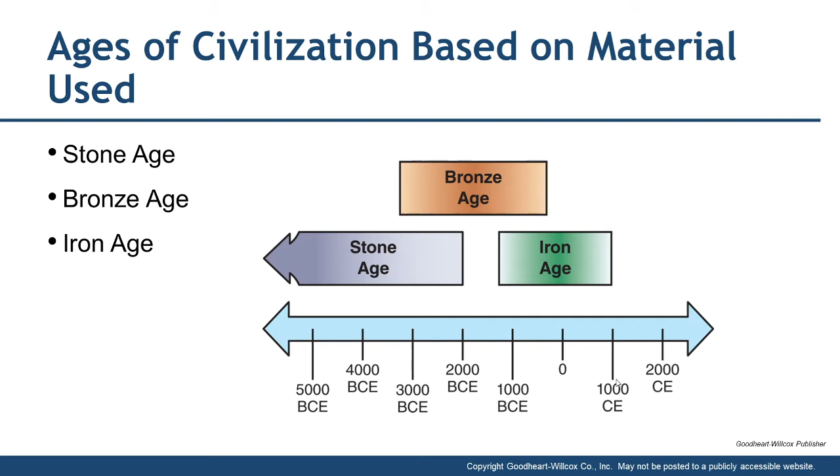Lots of times the age in which you live is defined or called by the main material that was being used. So we had the term Stone Age. If you look at the chart, the Stone Age ended around 2,000 years before Christ, and that's when, obviously, 1,000 years before then, it just shows how there are overlapping time periods where they're using both. We can see the Bronze Age overlapped the Stone Age and the Iron Age. It looks like the Iron Age ended in year 1000, but I don't know why that would be, because we are still heavily dependent on iron for steel. This little graph, I don't know, could use a little work. But anyways, that gives you the idea. Maybe they're ending iron at 1000 because that's when steel started to take over, even though steel is made 90+% out of iron.

Stones were the original materials for tools, found in nature, in their raw form. They are hard and brittle. They needed better materials for better tools.

They used to go and search for stones that they could use another stone with in order to knock off a piece that was sharp, and that was a skill. They used to flake it. If you go online, you can find videos of making Stone Age tools. They had to constantly be searching for these because the tools they would make would break down quickly because they were so hard and brittle.

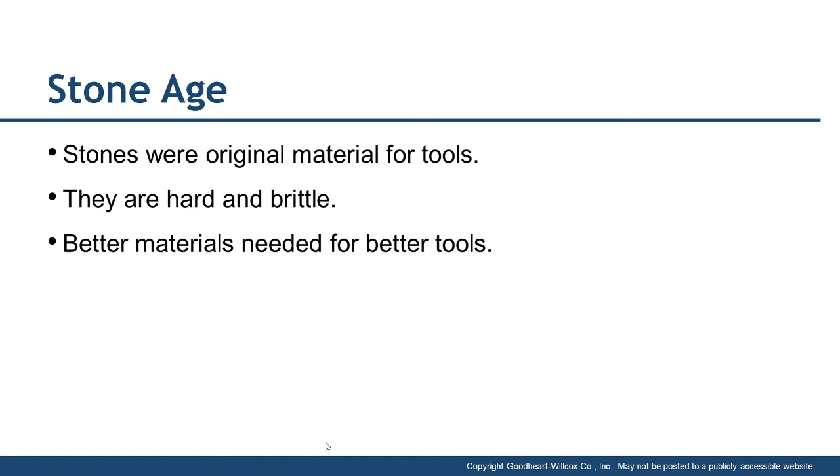So they needed tools that were better. These tools were very sharp, these made out of stone, but they just would not hold an edge for very long. They would hold an edge, but if you're cutting something like an animal to skin it, and you hit some bone with that rock cutting instrument, it could chip very easily. Just would not take any kind of abuse. So they were constantly on the move for new stones to make into cutting tools.

Metallurgy is the science and practice of working with metals. Basically, you can't really work with them until you can have them, so extracting metal from its ore was the first step. There's a link to a video showing this primitive skills channel that shows a person trying to make some iron the old way, and you can see it's very, very labor intensive, and hence the amazing ability for us now to make tons and tons of steel at relatively low cost.

Alloying and processing the metal to achieve desired properties. We're going to be talking a lot about alloys, which is basically a mixture of metals. Copper and gold were the first metals to be used.

They're found in nature. You can see this is a piece of copper ore on the right here, found in nature in metallic form, so they could use them as is. And then they could hammer and forge them into usable shapes and tools because they were malleable. They were able to be formed. Rock and stone you cannot form. All you can do is break them into different pieces, but you cannot fundamentally take it and change its shape.

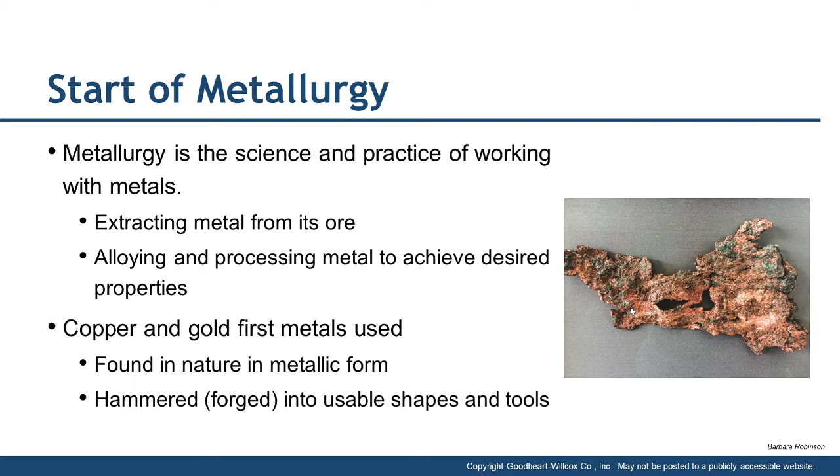Copper and tin ore melted together to produce bronze. So copper and tin make bronze, it's an alloy. Smelting is the process of extracting metal from its ore. That was on the last page. Alloying is a process of combining metals or non-metal together to make a different material.

Alloy bronze is stronger than copper. Copper is very soft, pure copper. Even the copper wire we have, I believe, is alloyed to some degree. Can't have pure copper.

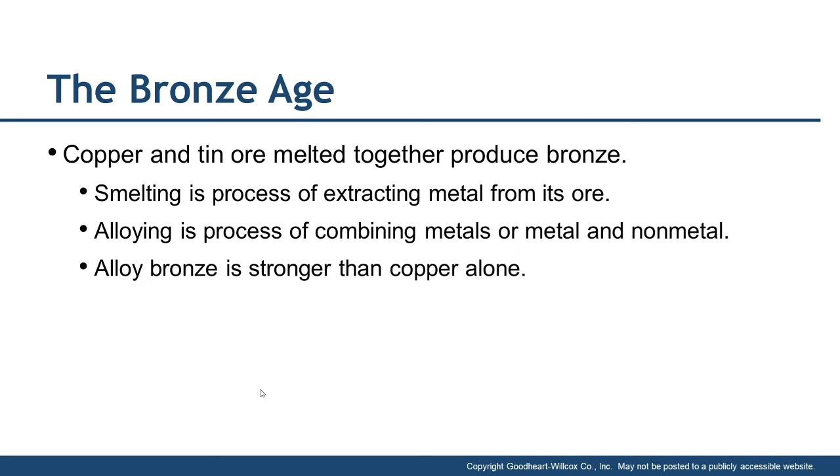Molten metal is cast into sand molds for cast bronze. So this is how they made, like you can see this little figurine here on the right. Open face sand molds were the first method of casting, used to produce intricate shapes. If you could carve a mold, you could make whatever shape you wanted.

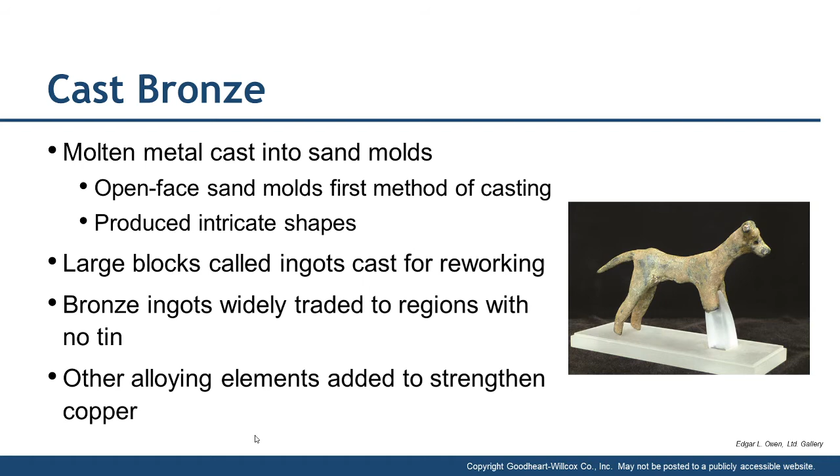Large blocks were called ingots for reworking. That's a term we still use today, even though we don't do the ingot method very much anymore. Bronze ingots were widely traded to regions with no tin. Other alloying elements were added to strengthen the copper, like nickel, one of them.

The Iron Age: first iron products were made from meteoric iron. So basically, if you're lucky enough to find a meteor, you had some quality material there. Very rare and highly prized for obvious reasons, not too easy to find meteorites. Even though we get hit all the time, most of them just burn up in the atmosphere and don't make it to the ground.

Smelting iron ore came about 1200 BCE. Iron ore, charcoal, and limestone are heated to produce the iron metal. Basically, smelting is to remove the iron from the ore, away from the other materials making up the rock. When that's removed, it's called slag.

This is more complex than smelting copper - multiple steps, higher temperatures, longer times, a lot more difficult. It's also difficult to completely remove the slag.

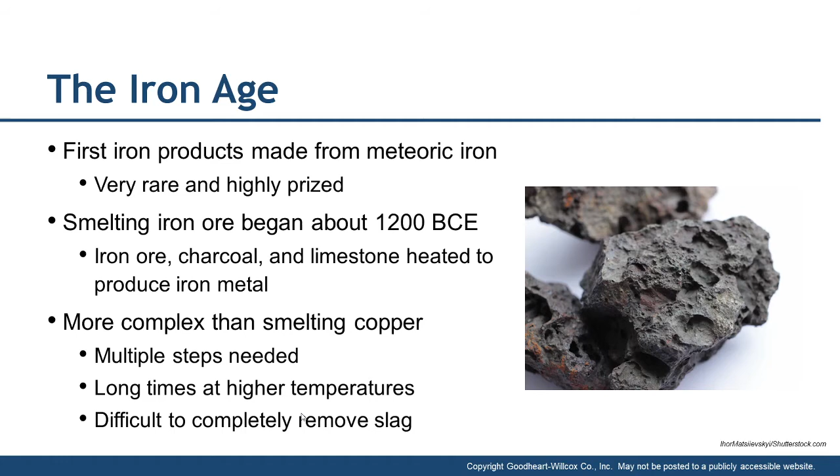Your melting temperature for iron is way higher than non-ferrous metals like aluminum. As a machinist, you know this well - aluminum will melt if you don't keep coolant on it and run too fast without coolant. Unless you push it really fast to make a thick chip, if you go slow you tend to melt it instead of cut it.

Wrought iron is smelted iron forged repeatedly to drive out slag. You're used to seeing blacksmiths with the hammer and anvil, hitting the iron and seeing sparks fly - that's what's happening when he hits that material with the hammer. He's driving out the slag; those sparks are the slag. So when you hit a piece of material that doesn't have a lot of slag in it, you don't see many sparks. A high quality, pure iron won't have those sparks coming out, or as many.

This produces stringers of iron metal called blooms. Blooms are forged into usable tools by heating and then working with a hammer, or in the modern era with some kind of press, a hammer press.

Wrought iron had a low carbon content - basically almost nothing. So it's really pure iron, basically pure iron. Bloomeries were the earliest furnaces for smelting iron ore.

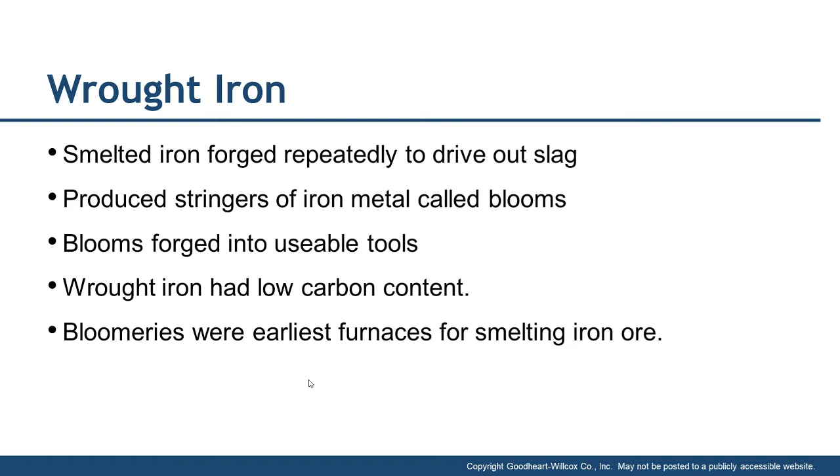Wrought iron and true steel - they produced true steel by melting in small crucibles. This higher quality iron was slag free. The slag is like an impurity that causes weakness, because the rock is brittle, and if you've got areas in your steel that are brittle, your iron is not going to be very strong.

The slag floated to the surface and separated from the metal. This kind of wootz steel has a higher carbon content - it's not pure iron, it's got to have some carbon in it to be called a steel. Much stronger - it was really the first true steel. They really didn't know why they were getting the results they were getting, but they just knew it worked.

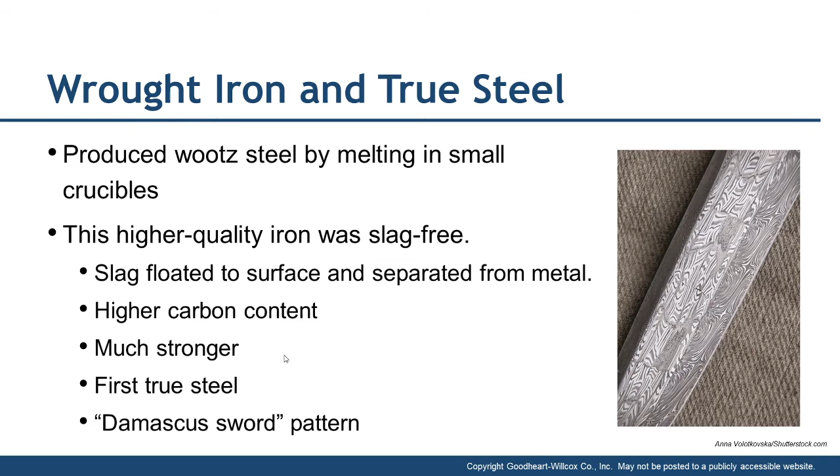You can see the Damascus sword pattern on the sword to the right - that's an obvious tip-off that it's Damascus steel.

Cast iron, the third form of iron, is made using blasts of air to increase furnace temperatures. It was independently discovered in Europe, Asia, and Africa - not sure where it originally started, but it looks like one of those things discovered simultaneously because the need was there. It was cast into simple shapes called pig iron - there's a thing in the book about the molds looking like little pigs suckling on their mother, and that's where the term pig iron came from.

This iron is not like wrought iron. Wrought iron has no carbon in it, steel has some carbon in it, and cast iron is 2 to 6% carbon, so it's a middle of the road. Normally most carbon content is going to be around 2%.

Cast iron contains carbon, silicon, and other elements, which lower the melting point, making it easier to cast. It's harder and more wear resistant than wrought iron, but very brittle - though it can take compressive loads, which we will cover later.

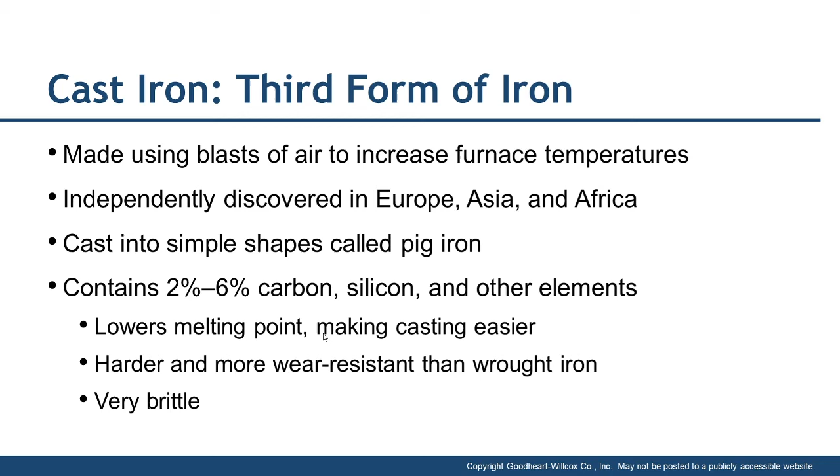Iron and steel alloying elements - carbon is the most important alloying element in iron. That's the number one thing to make steel: carbon.

As a machinist, we like to call things low carbon, medium carbon, high carbon. Normally, like if I'm making fixtures, you don't need anything fancy - low carbon, like 1018, which we will cover what those numbers mean, is fine. You don't need something really expensive to make decent fixtures with. Usually to keep the cost down you go with some kind of low carbon material, and plus it's easier to machine. So typically low carbon is what you're going to see - most of the steels you see are some kind of low carbon steel.

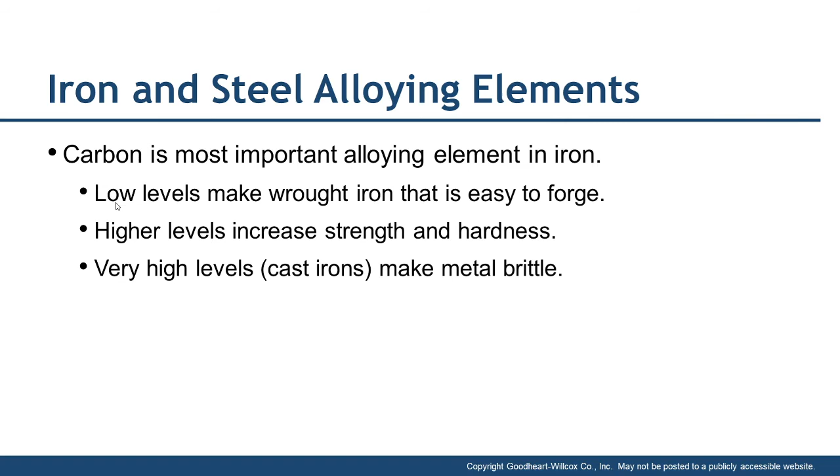Low carbon levels make wrought iron that is easy to forge. At higher levels it increases strength and hardness, and at very high levels, as in cast irons, it makes the metal brittle. Typically you don't have more than about 1% carbon in steel - it doesn't take much to totally change the game.

The Industrial Revolution in metallurgy - basically this permitted industrialization. If we didn't have steel... it really was the materials that typically led the way. Usually machine tools and such are catching up to cutting technology - in this case, machine tools are trying to catch up to computer technology, but I digress. Metals were improved by industrial inventions.

They kind of worked hand in hand - steam engines made of steel were safer and more powerful. There's a thing in the book about one of these steam engines that exploded because the steel was just not up to par, and then James Watt made his steam engine out of some crucible steel for the plates riveted together, I'm assuming for the pressure vessel, and that was successful.

Puddle iron process developed in the late 1700s produced larger volumes of higher grade wrought iron. Wrought iron has basically no carbon. Needed better process control. And the Eiffel Tower, ironically, was built in this time and made from puddle iron - a little tidbit.

Samuel Morse launched the telegraph commercially in 1844. So what did this create the need for? Tons of copper wire. The copper wire conducted electricity very well and formed long wires to communicate long distances.

Here you have an invention that needs a ton of an element that - did they cover that? Oh, they don't talk about that. The need for copper wire, since it conducts electricity well, actually helped Thomas Edison when he came along with electrical power generation. Then you had electricity which flows well over copper, and the copper helps make the electricity with electric generators.

So they kind of worked hand in hand, forming long wires to communicate long distance. Obviously the telegraph wires transformed into phone lines, and now we have the internet lines. But they make the lines smaller and smaller and smaller.

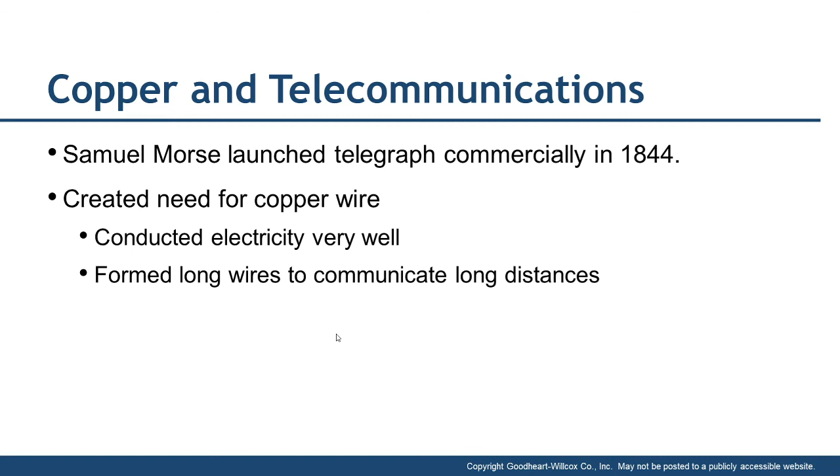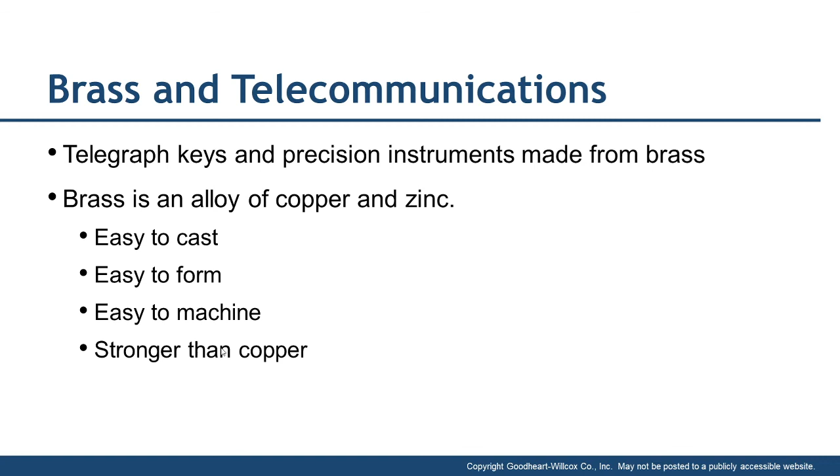Telegraph keys and precision instruments made from brass - brass is an alloy of copper and zinc. Bronze is copper and tin, brass is copper and zinc. Brass is a very popular machined material - easy to cast, easy to form, easy to machine. It cuts at short chips, so it's very forgiving machining wise. When a material short chips, meaning the chips come out and break off real easy, there's less chance of them clogging tools and breaking tools. It's stronger than copper alone - not much isn't, I mean copper is pretty soft.

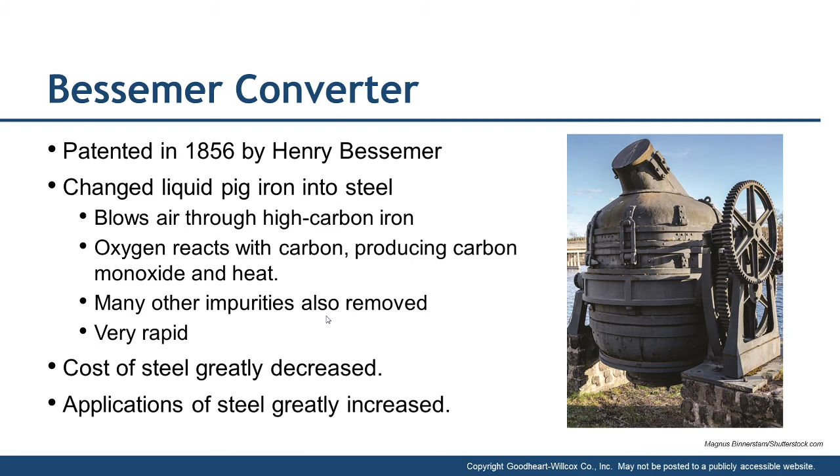This sped things up - it was very rapid. So the cost of steel greatly decreased, and application of steel greatly increased. If something becomes cheap and plentiful, people are more apt to use it versus stuff that is expensive.

Open hearth furnace, first operated in 1865 in France. Better quality steel than Bessemer, but much slower. So if you want the quality, you're going to have to pay more because it takes longer. But if you need that better quality in order to do what you need to do, it's economically viable. It took 8 hours to produce one heat, or batch, of steel - they still call batches heats. If someone has material, they'll write down the heat number on a piece of material so they know when it was made. The Bessemer converter produced a heat in less than an hour, so you're talking 8 times longer for the open hearth furnace.

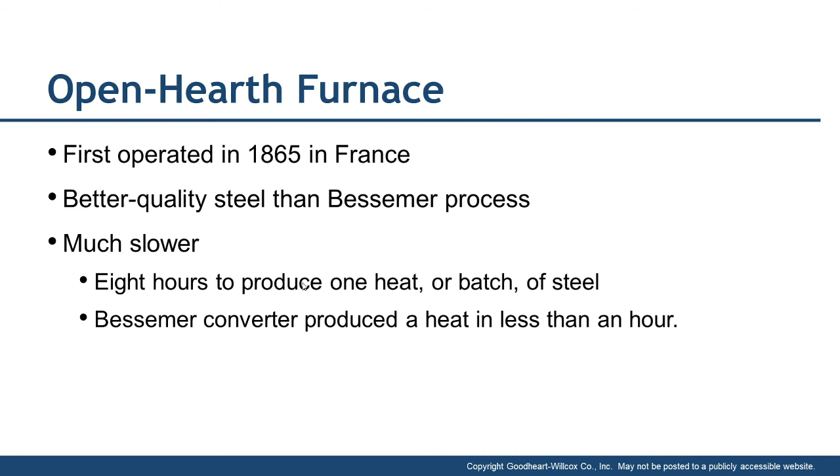Steel in America - Andrew Carnegie, kind of like the Elon Musk or one of these other tech giants of the day. These guys were the big boys that really fueled the economic engine of the country with the steel and building the steel. Andrew Carnegie was just obsessed with efficiency - he kept trying to make the whole thing as efficient as possible.

He built the world's largest steelworks in 1875 - Homestead Works near Pittsburgh, of course, steel country. Used the Bessemer process to make high volumes of inexpensive steel, and at the same time the railroads were being built or added to, since we already had the Transcontinental Railroad at that time, so there was lots of need for lots of volume of steel for these railroad rails. They added open hearth furnaces for making higher grade steel, naval armor plates as an example - obviously need some strength there for a naval vessel.

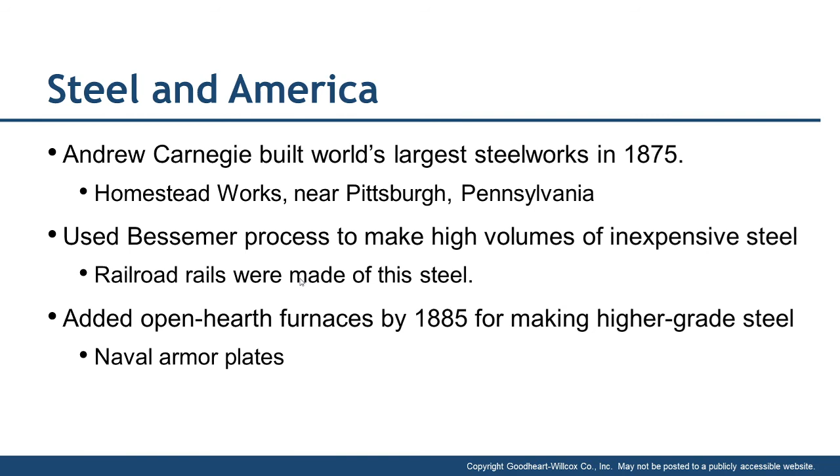Okay, probably battleship, I would think.

Electricity and metal refining. Thomas Edison developed the electric generator and distribution system in 1882. You can see how these different industries were coalescing at the same time. The ability to create electricity became valuable for refining copper. They went hand in hand—the electric current required to refine copper to high purity for electrical applications. So you needed copper for electrical generation, but people also wanted copper for communications. They went hand in hand.

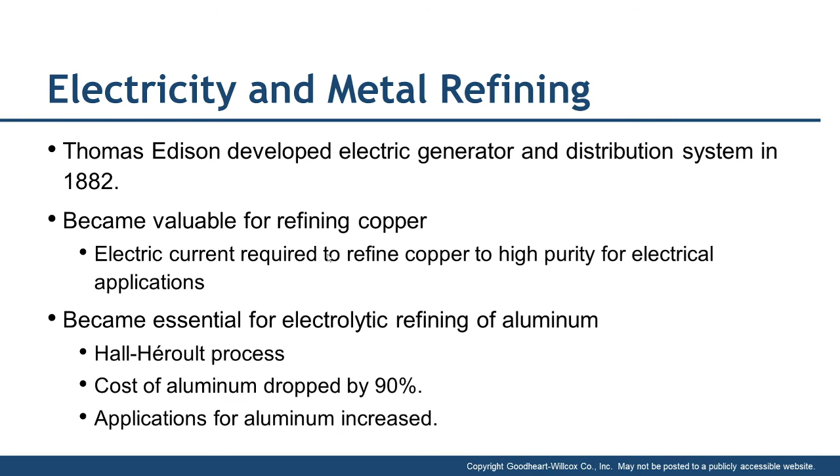Electricity became essential for electrolytic refining of aluminum. Aluminum is one of those metals that, when they built the Washington Monument, the capstone was made out of aluminum, and that aluminum was worth more than gold at the time because they didn't have electrical power like we do now. So the cost of aluminum dropped by 90%, and applications for aluminum increased. Like I said, anytime something's cheap, it gets more widely used. This was a big game changer in the last century.

In 1952, Austria installed the first basic oxygen furnace, adopted in Europe for rebuilding steelmaking after World War II. Europe was bombed into oblivion, so they started from scratch, building these basic oxygen furnaces. It's basically the same as the Bessemer converter, but using pure oxygen instead of air—much faster and more efficient than the open hearth. U.S. steelmakers didn't adopt it till '64, probably because they already had plenty of other furnaces around and didn't want to change over, but they had to in order to compete.

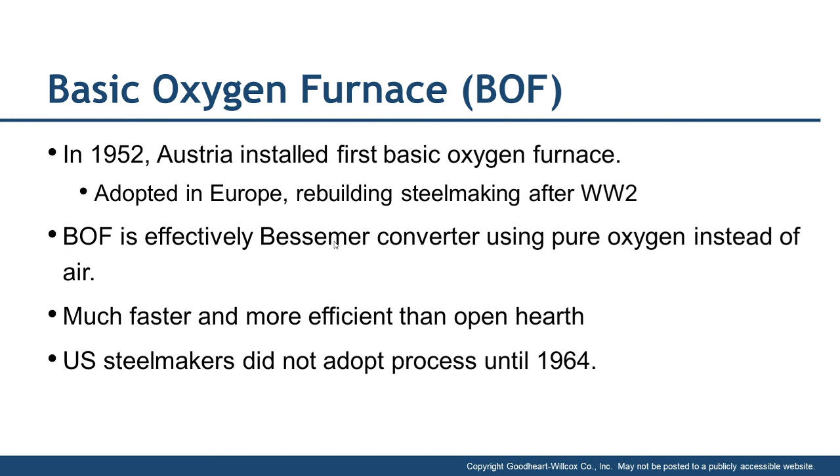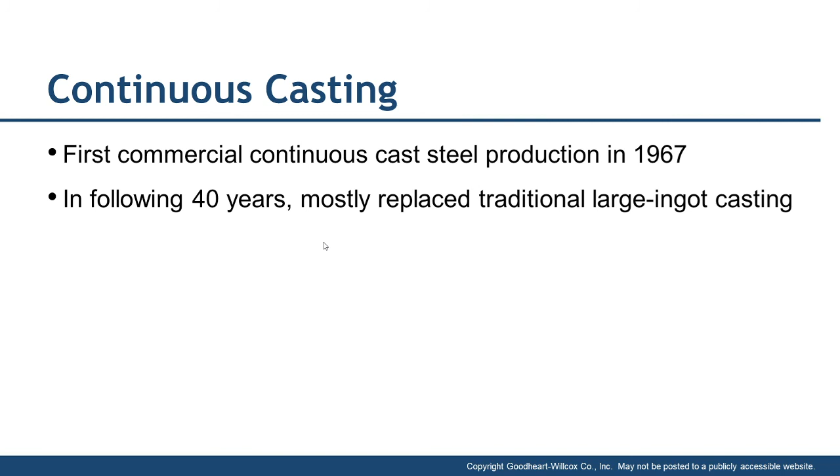Continuous casting—this is where you're continually casting steel, or iron and steel. You're not stopping; it's just one continuous process. They started this in 1967. Hard to believe, since I was born in '66. In the following 40 years, they mostly replaced your traditional large ingot casting—they used to produce one big giant piece at a time. Actually, my grandmother worked at Alcoa in the 40s during World War II, and she would drive a big forklift that moved these giant aluminum ingots around. Kind of an interesting thing.

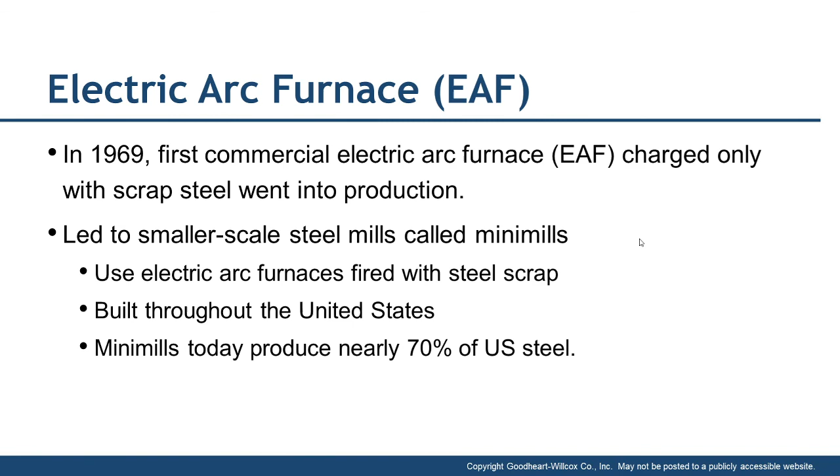Electric arc furnace—the first commercial electric arc furnace charged with scrap steel went into production, meaning loaded with scrap steel to make new steel. This led to smaller scale steel mills called mini mills, which used electric arc furnaces fired with steel scrap. So a lot of our steel is recycled. Built throughout the United States, today mini mills produce nearly 70% of our steel. It's amazing this stuff didn't come around until 1969. A lot of changes even in our lifetimes.

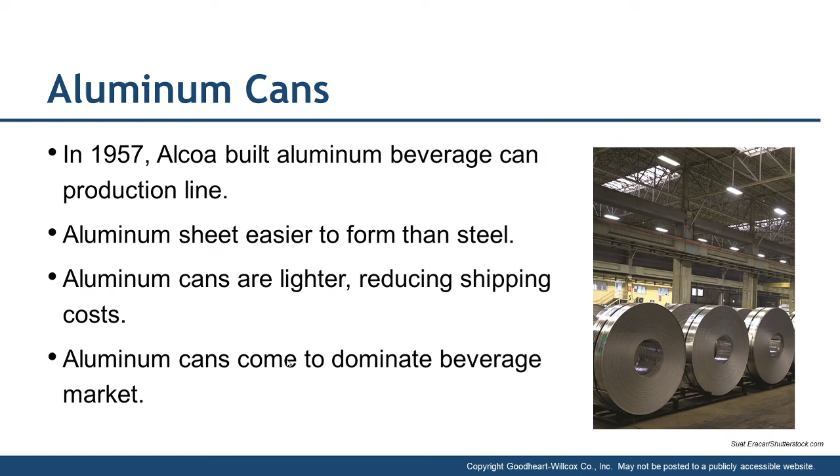Aluminum cans—Alcoa built an aluminum beverage can production line. My great grandmother worked at the one in McCook; I'm not sure if it's still there, but I think it is. Aluminum sheet is easier to form than steel, and aluminum cans are lighter, reducing shipping costs. Aluminum cans came to dominate the beverage market. I think it's something like over 90%, maybe over 95%, of aluminum cans are recycled.

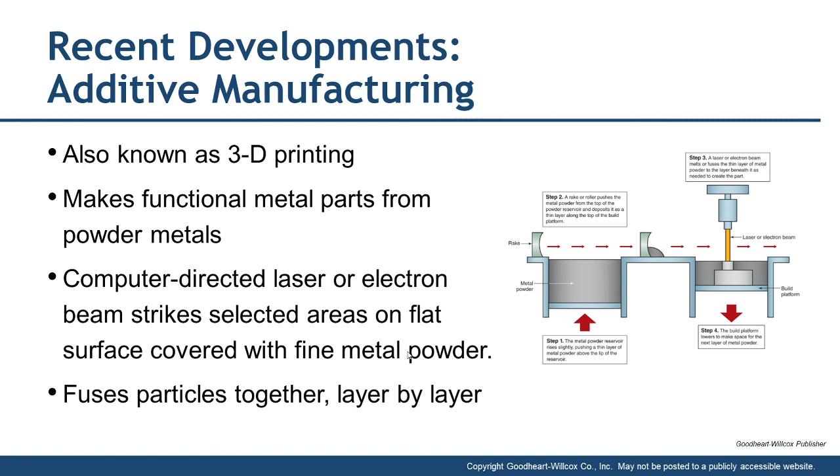That's basically how your 3D printing works, except I think the ones with plastic just move themselves up—they don't have the rake moving the powder. They're fed with a wire or cable of raw plastic instead. But it's the same concept basically.